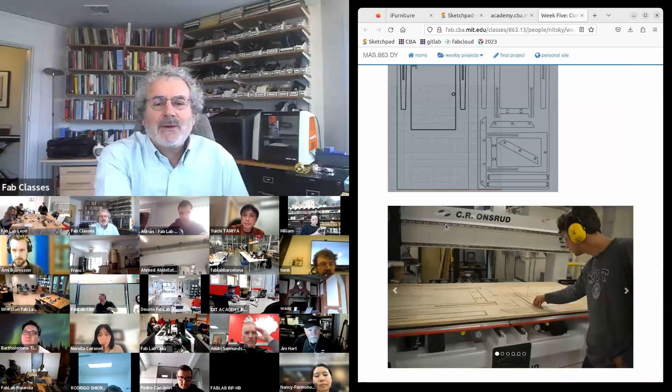So today's class is Make Something Big. We're going to do large format machining. And this is one of my favorite assignments. It's Make Something Big. So an example is, this was a student, David, whose girlfriend wanted a standing desk and he couldn't find a good one.

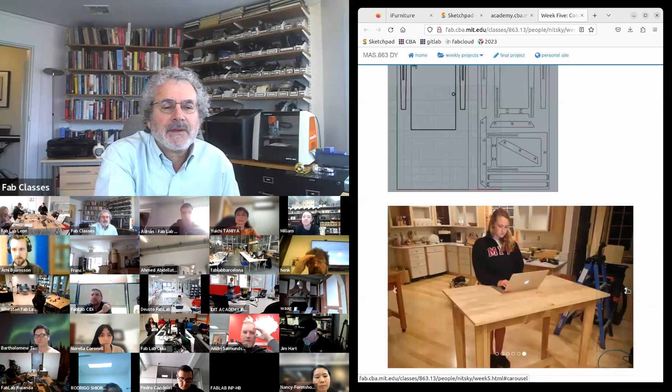So here, if we go back, this is using a large format milling machine, taking a 4x8 sheet of plywood, cutting out a kit of parts, and then assembling it into a standing desk. And then here's the girlfriend with the standing desk. And in fact, he spun that off as a startup, and this became a little business to make those.

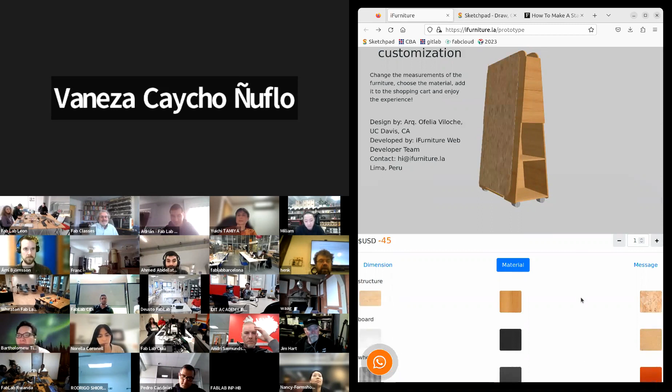So we are very happy because we just uploaded this new upgrade this week. So I really want you to explore and test, and maybe give us feedback, because you have a box to send us feedback about our project. Good. Thank you.

A few other examples of related projects. Open Desk is a series of open designs for furniture. At Fab is another site with examples of these. Let's see, there's a question about cost. Vaneza was listing projected pricing for it.

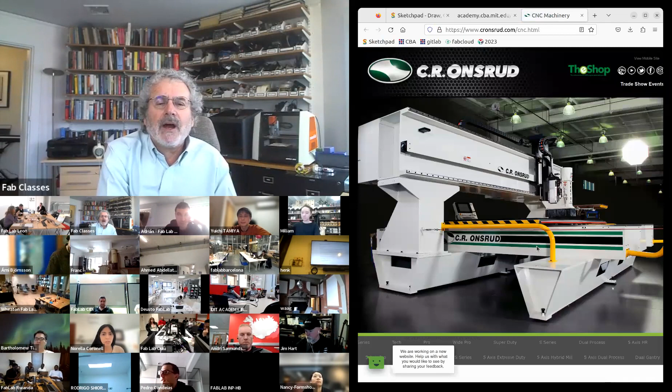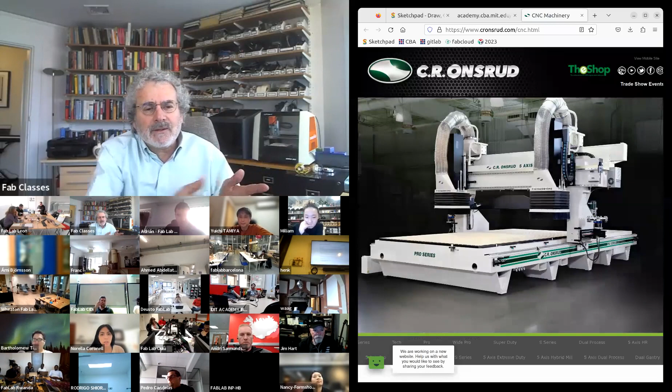Then compared to that, Onsrud makes machines that are $100,000 rather than $10,000. Roughly, the performance is similar. The difference is the Onsrud is much stiffer, so you can machine faster, and it'll last in sustained production much longer. The ShopBot, you periodically need to readjust. And so those are $100,000 scale production machines.

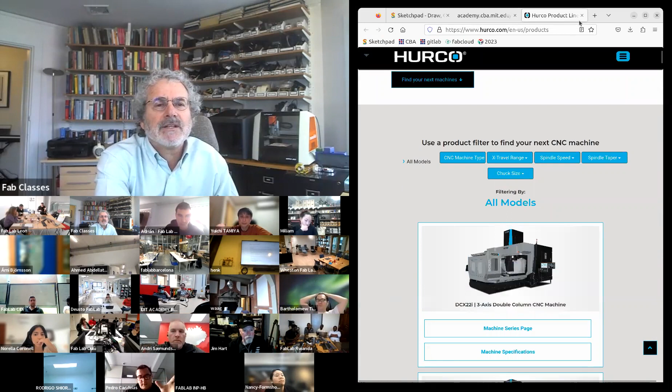And then beyond that, this is an example of a machining center where these go from 3 to 4 to 5 axes. They're much stiffer. They handle much higher torques, and those go up to hundreds of thousands of dollars.

There's a question about the Shaper. The Shaper really isn't quite enough for this week's assignment. The reason is I want you to do feeds and speeds and fixturing. So I do want you to learn how to use a large format tool. It's really difficult to do this assignment with just the Shaper. You can use the Shaper for part of the project, but it doesn't cover all the skills we'll be covering for the week.

Let's see, there's a note about Shapeoko. I don't think these get quite as large. These are on the small size of what we would call large format machining. And then Jens in Norway, I'll bring all of these people for the recitation. Jens has been doing really good work on open designs of machines of this size. Let's find the page for the Humphrey. Oh, Ricardo was saying Shapeoko Pros are, I see, a bit larger than I realized.

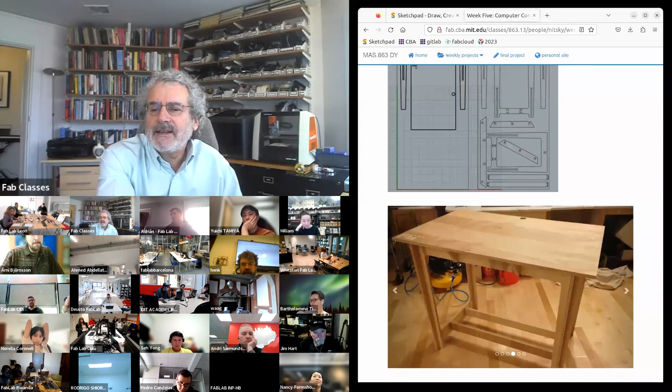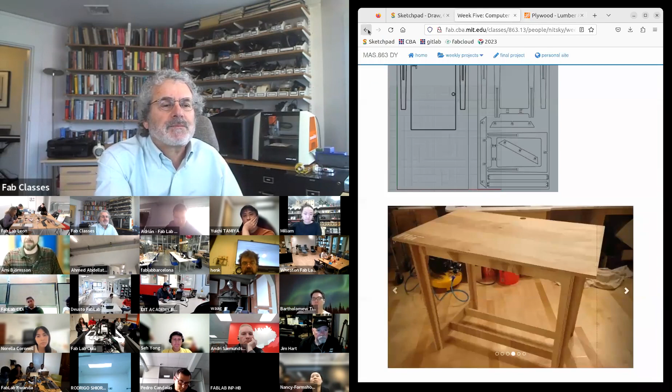Then MDF, let's see if they list that here. MDF is medium density fiberboard. This is short fibers in a resin matrix. It's much heavier, and it's got much worse structural properties. It'll crack, it handles lower loads. What's good about it is the surface is very smooth, and it machines really smoothly. So this is used, for example, in billboards to have a very smooth backing for a sign. But it's not a good structural material.

Medium density overlay is the best of both worlds. MDO has a plywood core with an MDF surface, so you get a better structural core and a smoother surface. Then we get to OSB. OSB is literally the sausage or hot dog of wood. Sausages are made from bits of meat left over put in a case, and OSB is bits of wood left over from making other stuff that you smush and glue together. OSB is the cheapest kind of wood. This had gone up, but it's back down to $10 a sheet, I'm glad to see.

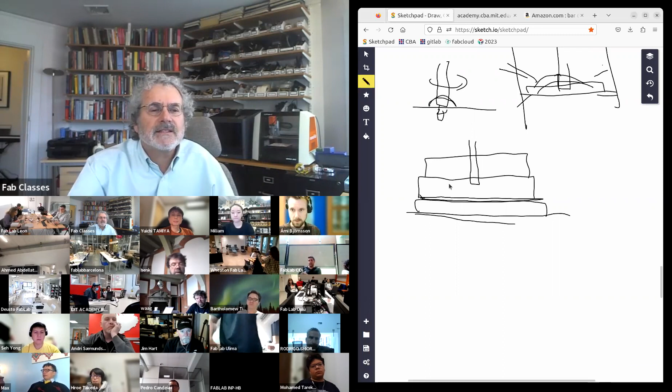The workhorse for this is a stack up. There's the bed of the machine. There might be one layer, and on this layer, you do a machining job where you machine the whole thing. What that's doing is the bed might be slightly angled compared to the gantry of the machine. So you machine a layer so it's flat in what the machine thinks is flat to make it square. Then we have a sacrificial layer, and this gets replaced periodically. And then we have your stock. And so you machine through your stock into the sacrificial layer. This gets cut up over time, and periodically you replace it.

So one of the best ways to do fixturing is to just get a cordless drill as a screwdriver and just put little wood screws in. So you pop in wood screws, and those let you distribute the hold down over the stock. Obviously, you don't want to mill over the wood screws, so you need to place them where you're not going to mill. But that's a nice way to do distributed hold down. You can get special nails designed for this purpose, and these are polymer ones, so it doesn't hurt if the milling hits them. It's a polymer nail, and you can pop them in with a nail gun or a driven screwdriver, and so those are forgiving.

When we get to machining wax to make molds, one of the ways we hold down is just with hot glue. You can make a bead of hot glue, and you can crack it off. For light machining, you can use double stick carpet tape. And for 5-axis machining, where you need to machine all the sides of a part, one of the techniques is you take your stock and then you cast it, for example, a high temperature metal in a low temp metal, you do all of your machining, and then you melt away the encapsulation. So fixturing is a non-trivial task for this week's assignment.

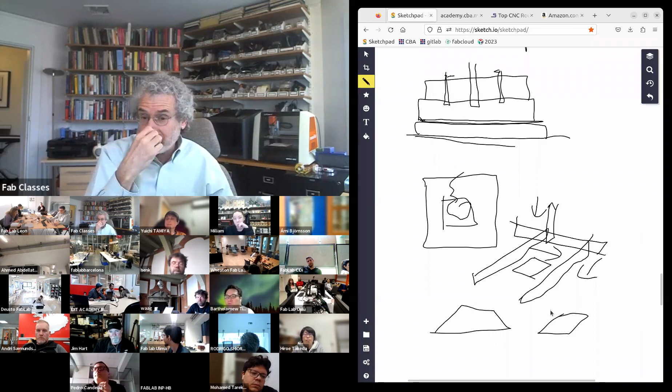So one of the things you need to do is you need to square the machine. You need to adjust all of these so that the machine is square. And for a less stiff machine, you loosen and tighten bolts. And so the main way you do this is you do a test cut and you cut out a square, and you check to see, is the square a trapezoid? Is it a shear? You check the shape of a cut, and you use that to adjust the machine. And if you haven't done that periodically in the lab, it's an important thing to do to just check that the machine is square.

Dust collection. So, by the way, when I use Amazon, I'm not particularly recommending buying from Amazon, which is a non-trivial subject. It's just a convenient source to find illustration examples.

So this is a dust collector. When you machine wood, you're producing lots of fine dust. It's not seriously toxic, but it's not good to breathe. And it'll cover your lab, it'll get into the computer, it'll get everywhere. So you don't want the dust to leave the machining process. So a tool like this sucks up the dust from the machine. And a good rule of thumb is if there's a layer of dust around your large format machine, something is going wrong. It shouldn't be escaping the machine. It should be going into the dust collector.

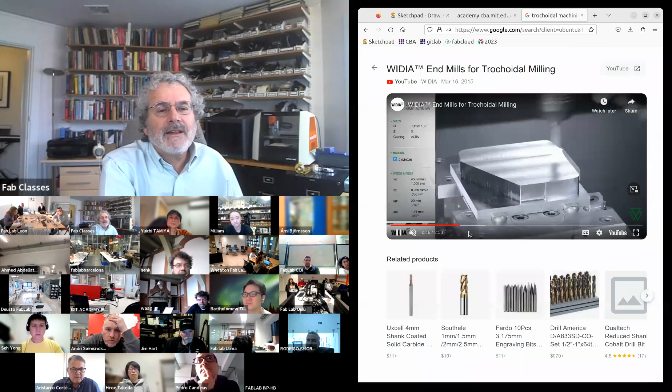In trochoidal milling, let's see if there's a good video. In trochoidal milling, it looks like, okay, good. This is what I want to show you. It looks like the tool is going crazy. So right now, let me get to where it was doing it. Okay, so that's trochoidal milling. What it's doing is,

climb machining makes a chip that starts thick and ends skinny. Conventional makes a chip that starts skinny and ends thick. What trochoidal milling does is runs the milling machine in loops like that. And what that's doing is it's giving you chips that are roughly constant cross section. And so trochoidal milling lets you make smoother surfaces with faster machining by spinning around. It's a little bit like an orbital sander. It's spinning in loops. And so that's trochoidal milling.

For this week, you'll be milling on one side. For some machining, you need to register, flip, and do both sides. 2D machining is you just plunge and cut. 2.5D is you cut in layers. 3-axis machining is where you move all of the axes at the same time. Once you're doing that, you need to account for the length of the tool. Then a lot of this we'll worry about in mold making, about how deep you can cut. For this week, we don't need to worry about these issues.

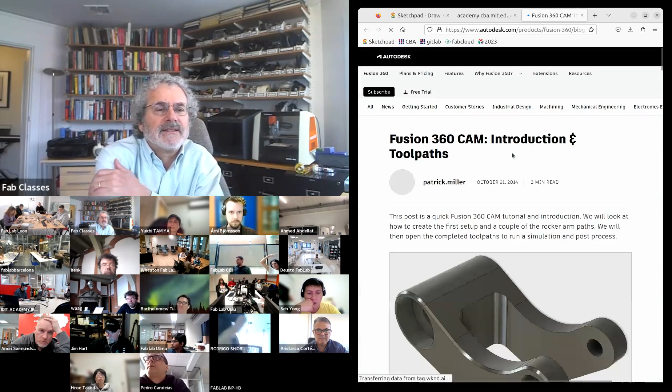This is commercial CAM software. It's really an AI problem. You're trying to take the brains of a machinist and put it in a software. FreeCAD has a path planning module. I know this exists; I haven't tried using it. One of the strengths of Fusion is Fusion has very nice, very powerful CAM built into it. SolidWorks has CAM. Fusion's CAM is in particular very tightly integrated.

And then mods, which I originally wrote and is forked into a community project, can't do advanced toolpaths yet. It could be added. But this is an example of, I've loaded in a shape, and then here's all the machining parameters, and then it just generated that, and that's ready for machining. And so mods will let you easily make simple tool paths. It doesn't yet do the more advanced machining operations.

If you really get ambitious, the formats the machines use are easy to write. And so if you're doing something algorithmic and like programming, you can actually write these toolpaths directly. Of course, you want to simulate it first before it gets to the machine.

Okay, safety. This is the most serious week for safety. This is a horrible story about a student at Yale who died in a machine shop. She was using a lathe. Her hair was loose. Her hair got caught in the lathe and she died.

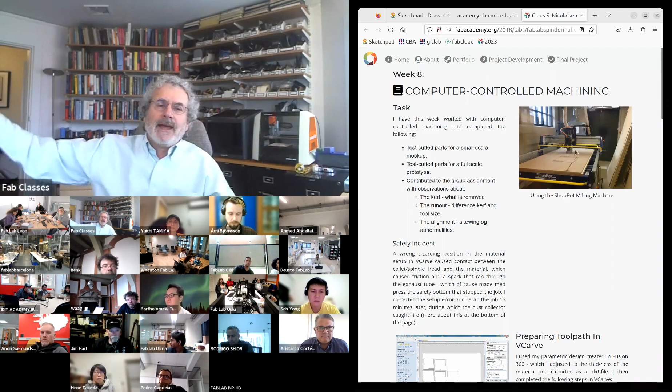And this was an example, in this class, at this nice Fab Lab, if you look, you'll see that line there. This was an example of the depth and the location of the cut origin being set wrong. So they started the job and it went plowing into the machine. They thought everything was fine. They went on with their work. And then the fire department came.

So what had happened was they have their stock. The tool had plunged into it really fast, really deep. The dust collector had sucked the chips out and brought them into the dust collector. The dust collector has a fan pulling in, and then you've got the chips in here. These were so hot, they were glowing.

They got into here, and now they're in a place that has easily flammable material with active airflow, and the hot little embers ignited inside the dust collector. And once you have a fire in a dust collector, you can't do much more than call the fire department. You can't easily put it out. And so it ignited. Here's the back action of the fire coming out through the dust collector back into the machine from the fire that was ignited from the chips from the machining.

And so that was a great example of the need to cut air before you machine. When we machine circuit boards with tiny little end mills, you'll break them if you do something wrong and will be unhappy, but no more than that. These bigger tools, if they break, hot, sharp chips come flying out, and it's very hazardous. So you should never, ever break anything. If you do everything right, there's no way to break these tools. If bad things happen, you can break them.

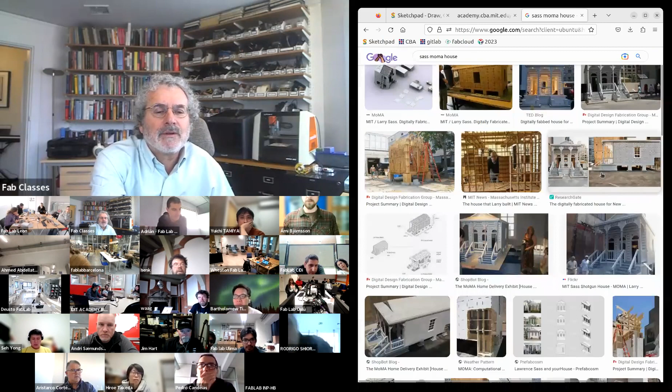Then make, and by make, I mean design, mill, and assemble something big. This is a link to this lovely project done by a colleague at MIT, where he made a shotgun house for the Museum of Modern Art. And the whole thing was made on a ShopBot and assembled with a rubber mallet. So this whole house is just pieces snapped together. You don't have to make a house for this week. Ricardo is noting, yeah, gloves to handle wood, not for running the machine.

So make something meter scale, and furniture is a great example for this week. At the end of the week, you should feel liberated that you can make things on the scale of the environment around you. Extra credit is avoid the need for fasteners or glue and design joint systems. And other extra credit is don't just make flat pieces, but play with flexures and curves to make something with curvature. You don't need to do it, but those are interesting design challenges for the week.

You're going to be limited by machine time. So you can't do this assignment just before class. Get the design work done early and leave plenty of time to get in the shop for the machining. Okay. So that's large format machining.